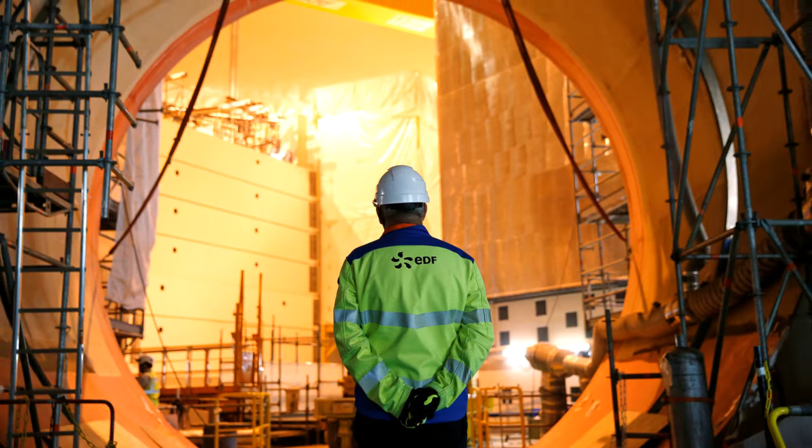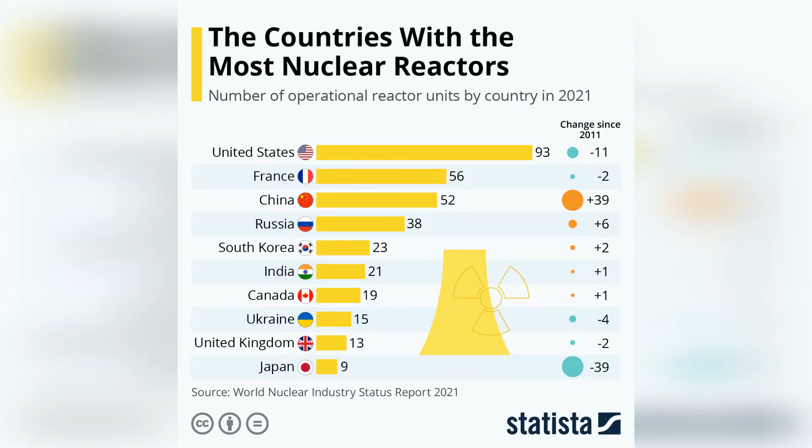There are now 56 nuclear power units operating in France. This is the second largest nuclear power plant fleet after the United States. The share of nuclear energy is about 70%. And the most interesting thing is that it was all done in a very short time. France built 70% of its nuclear power in just 10 years.

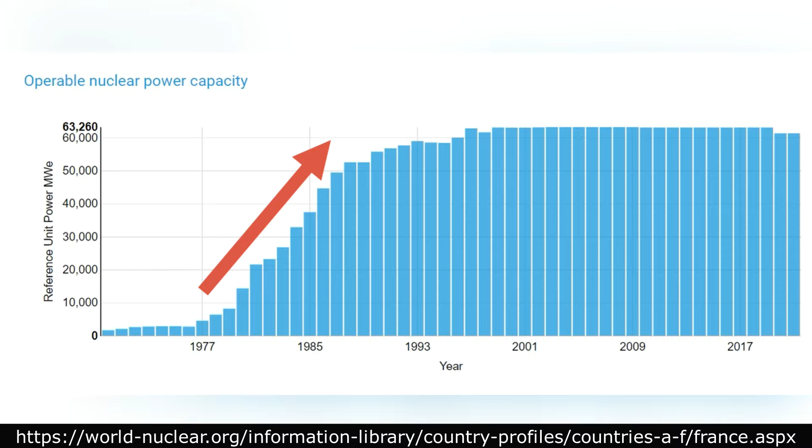From 1979 to 1989, the capacity of their nuclear power plants increased from 8 to 52 gigawatts, that is, more than 6 times. The example of France shows that nuclear energy allows in a fairly short time to radically change the country's energy sector, dramatically reduce emissions, while creating reliable sources of electricity that do not depend on either the weather or changes in hydrocarbon prices.

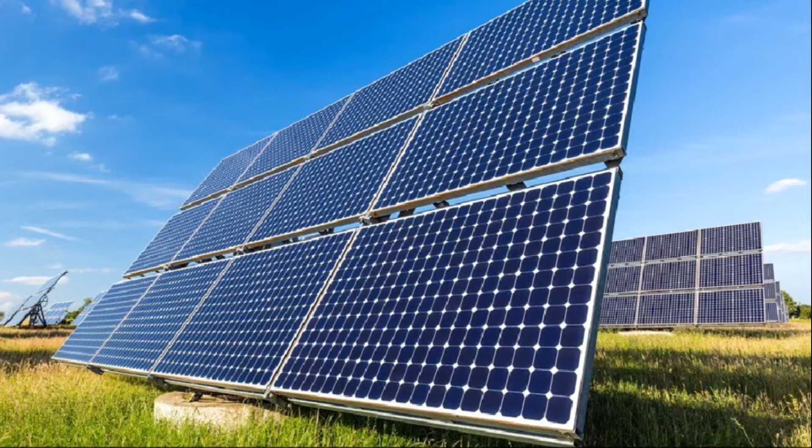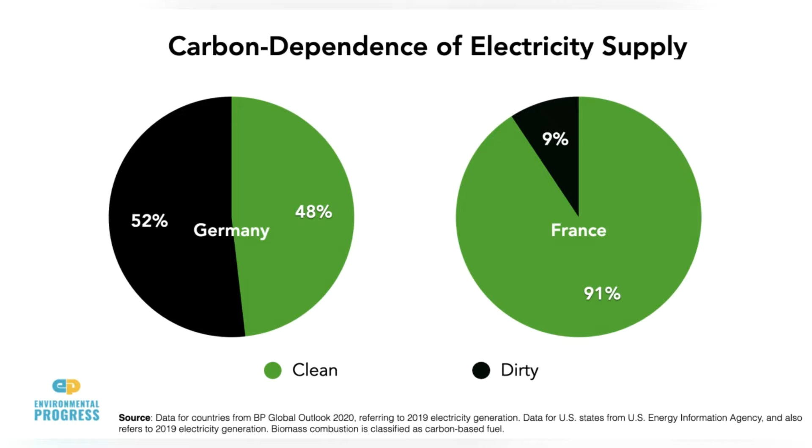Trying the same kind of energy system change, but with only solar and wind power plants, Germany so far cannot show the same results, neither in terms of the speed of change, nor in terms of the achieved indicators. The share of renewable sources in the energy balance of Germany is already about 40%. But emissions per kilowatt-hour are still several times higher than in France, because, abandoning the atom, Germany continues to burn coal and gas.

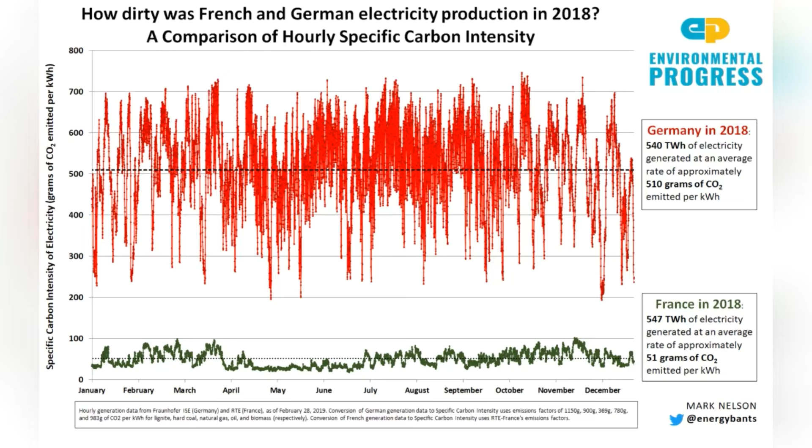France, along with the UK, are European leaders in promoting the idea of developing nuclear energy, and together with them, at least 10 European countries are in favor of this.

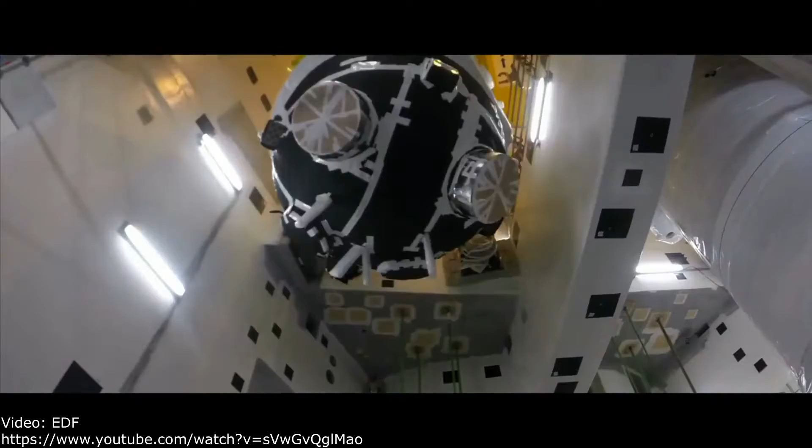Another important point in Macron's speech: he specifically emphasized that the planned construction will be the first construction of a new nuclear power plant in France in decades. It's true. The last time a new nuclear power plant was built in France was at the end of 2007, more than 15 years ago. This was the Flamanville 3 nuclear power plant, which is still not actually completed.

Speaking for the whole of Europe, well, not counting the launches of nuclear power plants in Russia and Belarus, the last time a new nuclear power plant was launched in Europe was also 15 years ago. In the same year 2007 it was the launch of the Cernavodă nuclear power plant in Romania with a Canadian CANDU reactor. But in principle, new large power units in Europe are now beginning to be built.

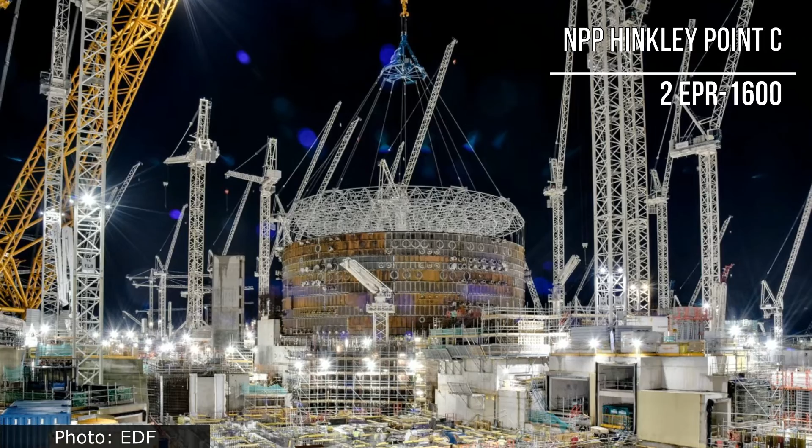In 2018 and 2019, the construction of 2 units of the Hinkley Point C nuclear power plant in the UK began. By the way, it is France that builds them. But I will talk about them a little later.

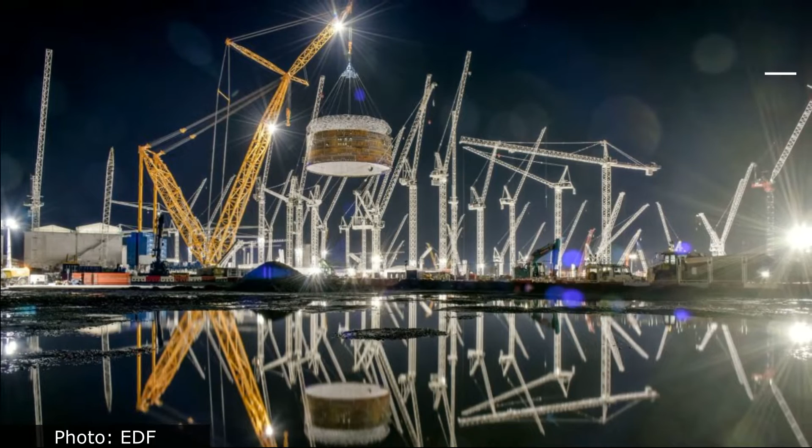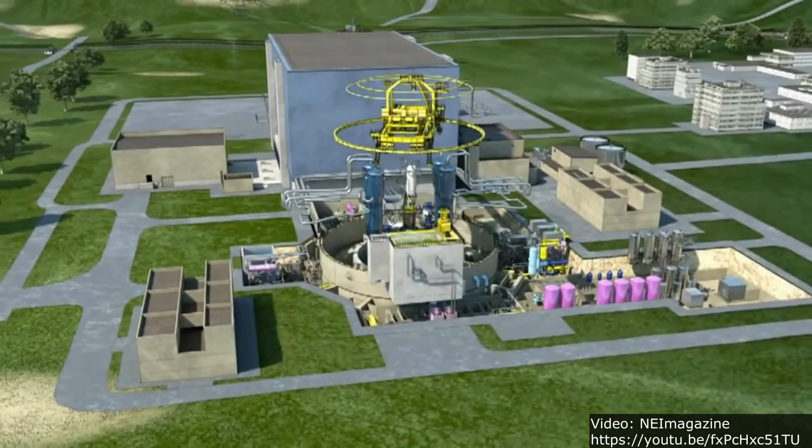The main new reactor for future nuclear power plants in France should be the EPR-1600 reactor, or its improved modification, EPR-2. EPR stands for European Pressurized Reactor, that is, the European Pressurized Water Reactor, although in the case of the export version, the first letter E stands for evolution. By type, this is a classic PWR, with an electric power of about 1650 megawatts. This is the most powerful nuclear power unit in the world.

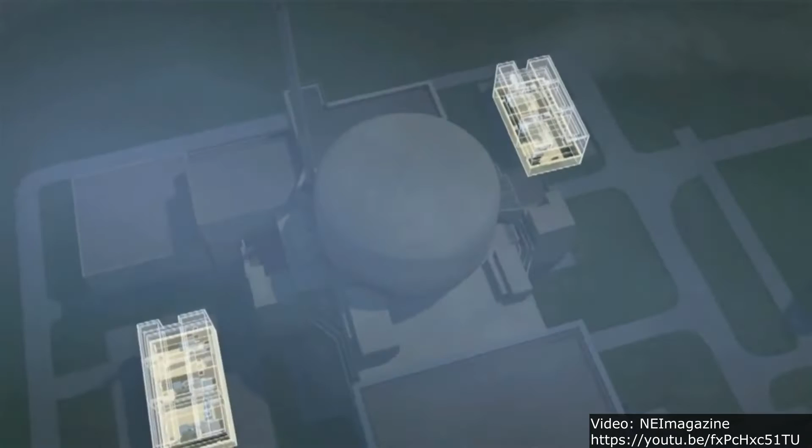The closest operating power units have a capacity of about 1,500 megawatts, and these are just the predecessors of the EPR, the French N4 reactors, on the basis of which it was designed.

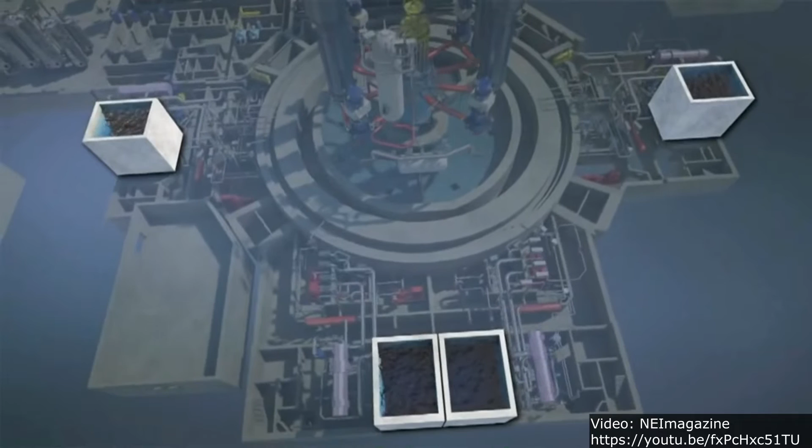Speaking of design, the word European in the name is not accidental. Initially it was a joint German-French project developed by the companies Framatome of the Areva Group and the German Siemens. This is the first European 3+ generation reactor.

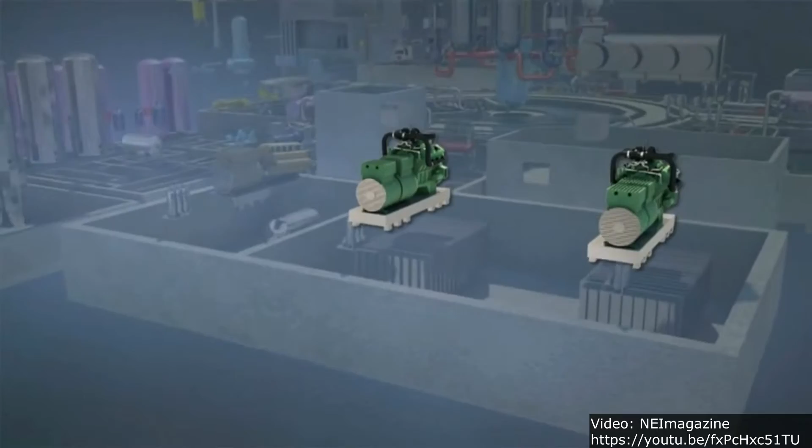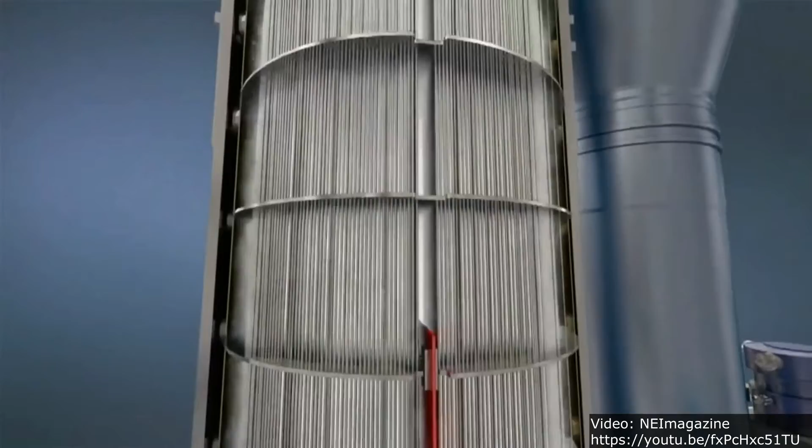About the generation of reactors, it will probably be necessary to make a separate video. But let me explain that what is now being built is mainly reactors of the 3rd generation, and even generation 3+, which have additional post-Fukushima safety requirements. In general, Generation 3 differs from its predecessors in greater fuel efficiency, better economic performance in both construction and operation, and improved safety systems.

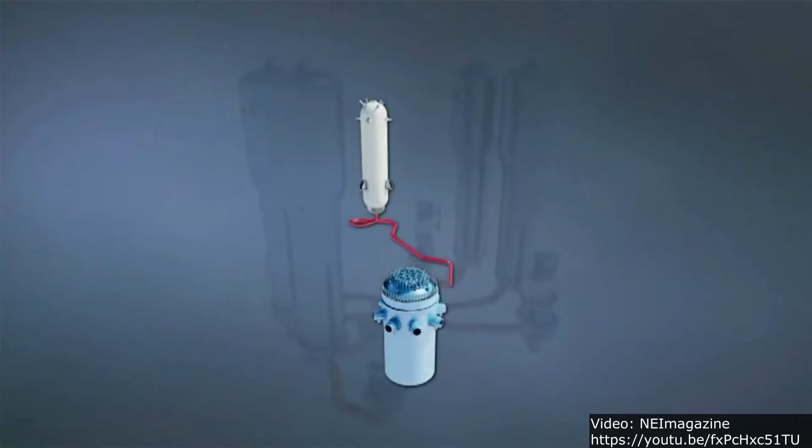Specifically, if we talk about EPR, then it should use 17% less uranium, be able to operate on reprocessed uranium and on a full load of MOX fuel. In the meantime, in France, MOX fuel is loaded into some pressurized water reactors, but only partially, no more than 1/3 of the entire core.

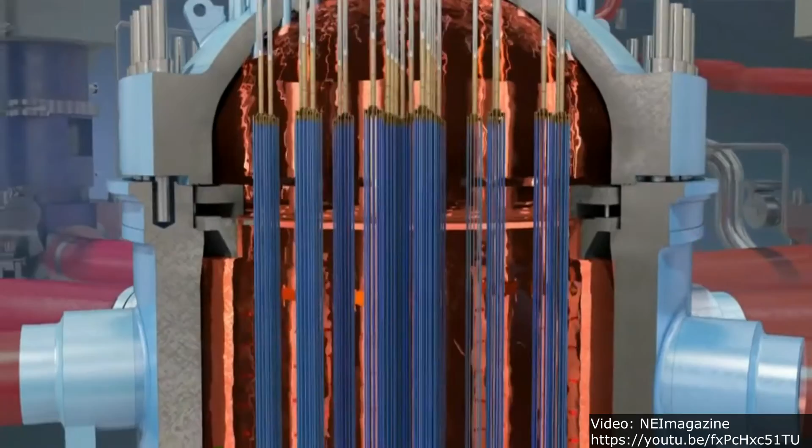EPR can also work effectively in maneuver mode, reducing its power depending on the load in a wide range, from 50% to 100% of power during the day. In addition to improving safety, which reduces the likelihood of severe accidents by orders of magnitude, it has systems for localizing beyond design basis accidents.

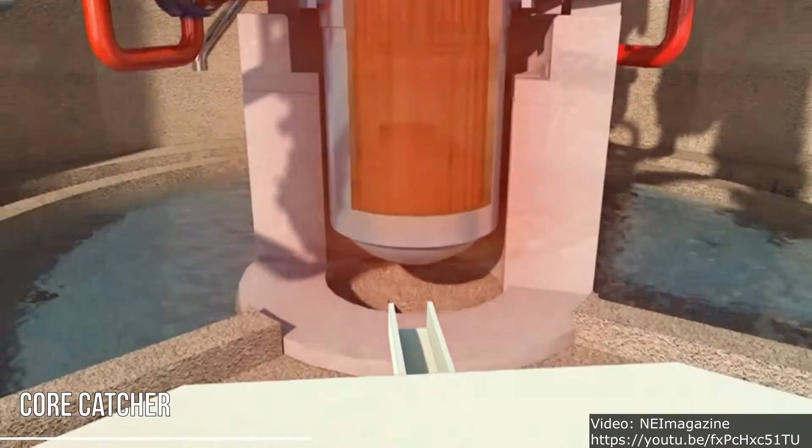This means that even if the worst happens and the reactor core is left without cooling, it starts to warm up and melt, as was the case in Fukushima or Three Mile Island. It has a special core catcher under the reactor to hold the molten fuel, so it should not go beyond the sealed volume of the power unit.

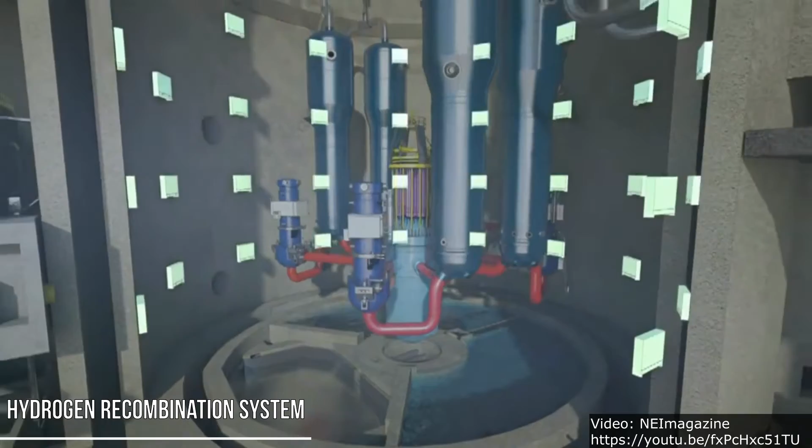In addition, there are hydrogen recombination systems, which also excludes the Fukushima scenario, where the hydrogen formed in the core due to the zirconium-steam reaction led to explosions in reactor compartments and radioactive emissions. Here at the EPR there are systems that will utilize this hydrogen if it appears in the reactor compartment. Not to mention that they are now developing and gradually introducing tolerant fuel, which should solve the same problem by excluding the steam-zirconium reaction.

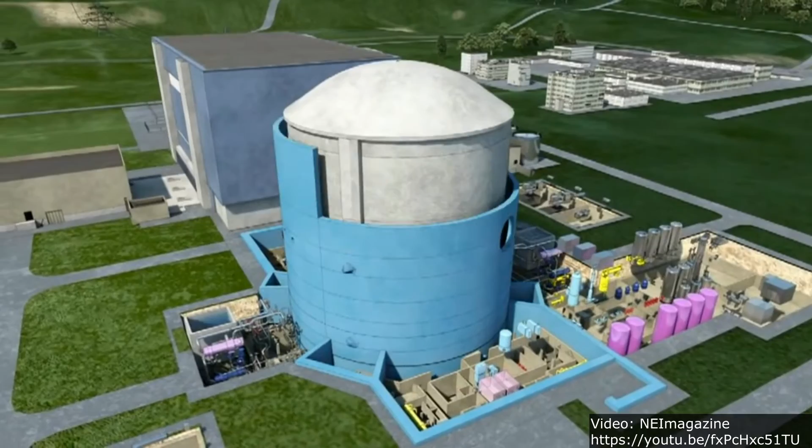Of course, the unit has a reinforced double concrete case covering the reactor compartment. But it's worth noting that similar systems, in whole or in part, exist in other Generation 3+ reactors, for example the South Korean APR-1400, American AP-1000, Chinese Hualong-1, or Russian VVER-1200.

But let's go back to France and look at where EPR reactors are being built. They are now being built in France, Finland and the UK, and the first two such reactors have already been built in China. The first EPR reactor began construction in Finland in 2005, at Unit 3 of the Olkiluoto NPP. Fortunately, this spring it was finally launched, becoming the first EPR built in Europe.

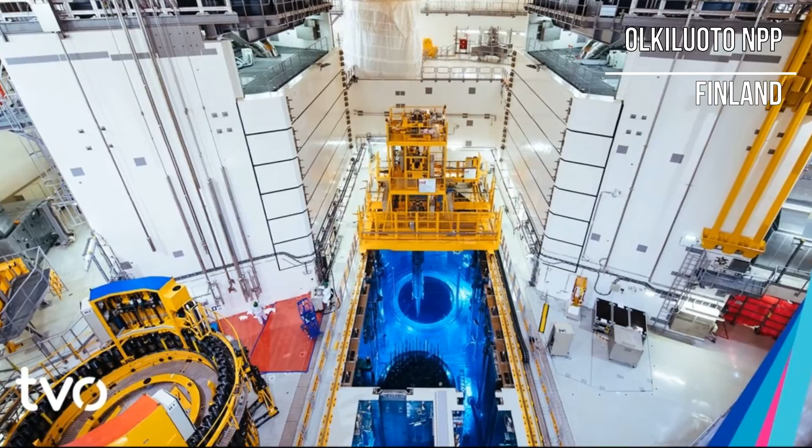Two years after the Finnish one, in 2007, construction of a unit with an EPR reactor began in France itself — the third unit of the Flamanville nuclear power plant. This is the last unit of a nuclear power plant to begin construction in France in more than 10 years, as Macron said. This unit has unfortunately not yet been completed, but it's expected to happen this year or next.

Delays in construction also led to an increase in the cost of the station. They grew from 3.2 billion to more than 12 billion euros — four times — that's over $8,000 per kilowatt.

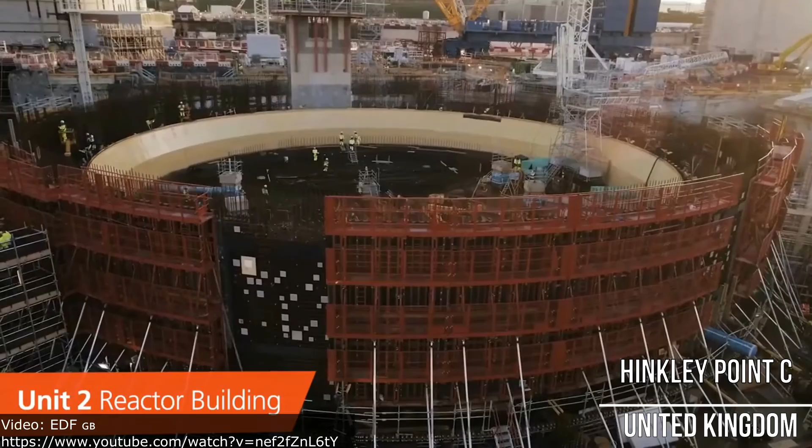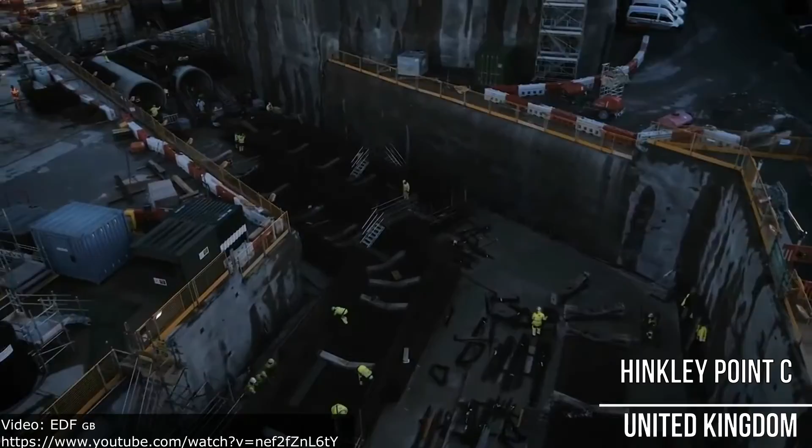In 2018, construction began on the Hinkley Point C nuclear power plant in the UK with two EPR-1600 reactors. This is the newest and largest nuclear power plant construction in Europe at the current time. The two power units, with a total capacity of more than 3 gigawatts, will provide about 7% of the UK's electricity. Its cost is also huge, about $30 billion, or about $9,000 per kilowatt.

By the way, the French EDF together with the Chinese company CGN pay for it. The latter owns about 30% of the project, and the French own two-thirds. Hinkley Point C is planned to be handed over by 2026, unless, of course, there are delays.

The only EPR-1600s built so far are operating in China — two units at the Taishan nuclear power plant, launched in 2018 and 2019. They were also built with delays and an increase in estimated cost of about 60%, but still ended up cheaper and faster than in Europe.

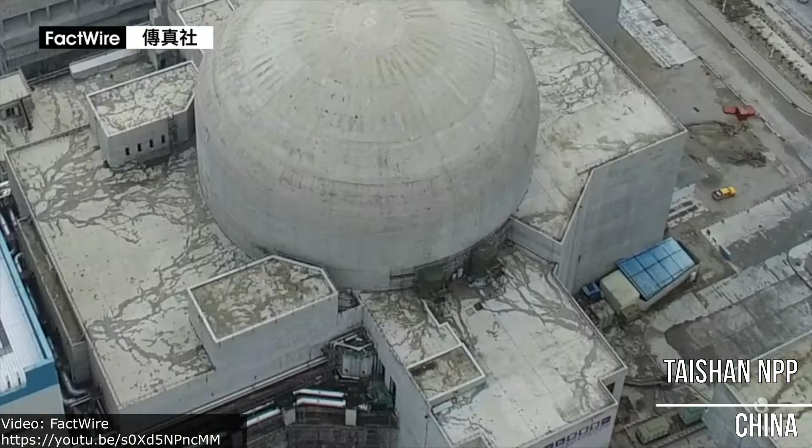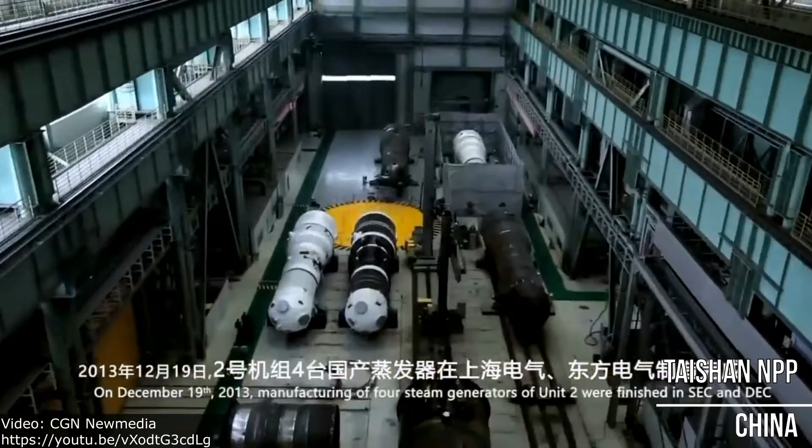Their cost is estimated at half that of the European ones, about 6 billion euros per power unit, or about $4,000 per kilowatt of capacity. This nuclear power plant, like the British Hinkley Point, is a joint Chinese-French project, but the shares are different — here 30% belongs to the French EDF, and 70% of the project belongs to Chinese companies.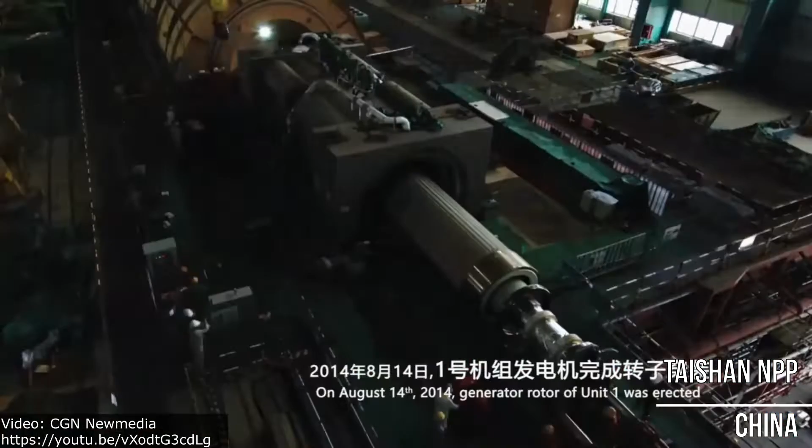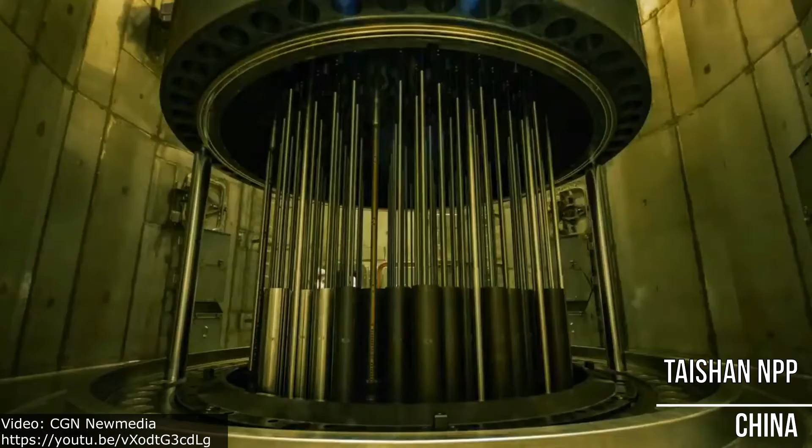So China, with its massive serial construction, and most importantly with access to cheap government money, shows that it is possible to build a nuclear power plant much cheaper. I talked about the mass construction of nuclear power plants in China and the results of last year in a separate video — the link to it is now on the screen at the top.

According to some estimates, if the construction of Hinkley Point C in the UK had attracted cheaper public money — for example, 2% government bonds — instead of private loans with a higher interest rate, the construction could have cost half as much as in China. That is why the inclusion of nuclear energy in the European taxonomy is so important: it will allow attracting financing to nuclear projects on more attractive terms.

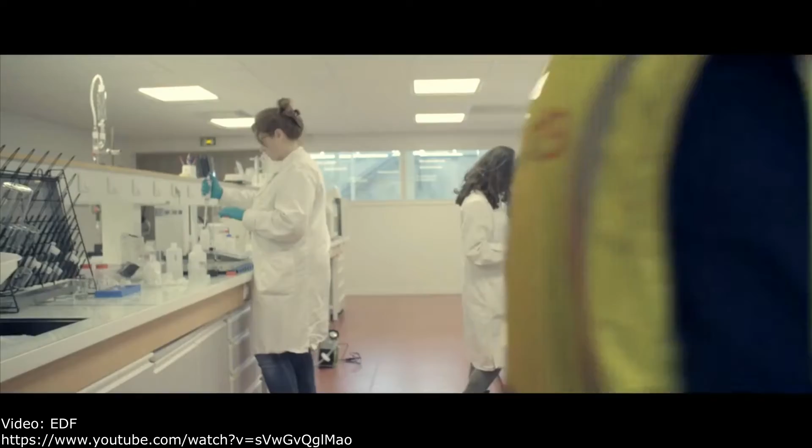Let's get back to technology. France is well aware that the offered prices for its nuclear power units are among the highest on the nuclear market, and is trying to take into account the bitter experience of construction both in France and in Finland, and the more successful experience in China.

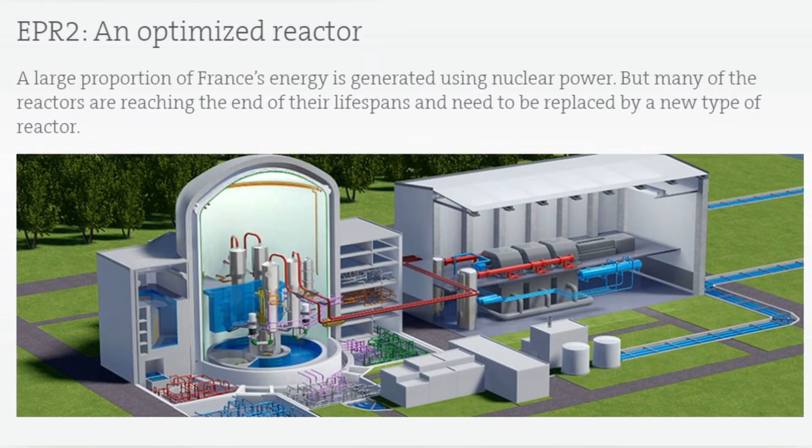Since 2015, they have been developing an optimized EPR-2 reactor, which should be cheaper both in construction and operation, and perhaps even its power will be reduced. In France, EDF plans to build 6 units in the first place, 2 at each of 3 sites. Such a combination should also help optimize costs.

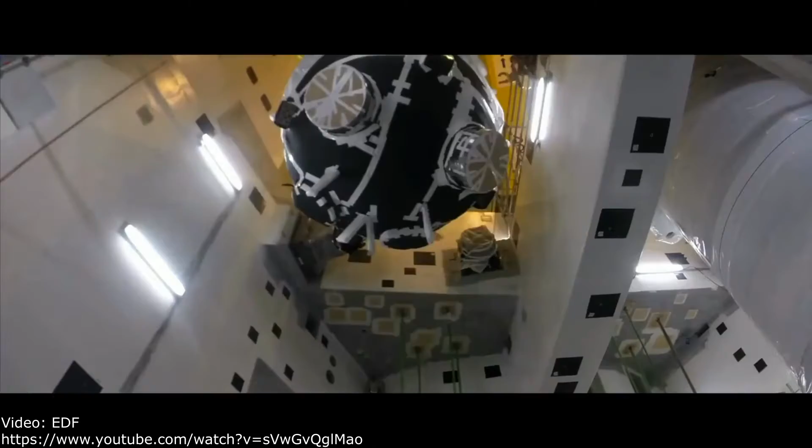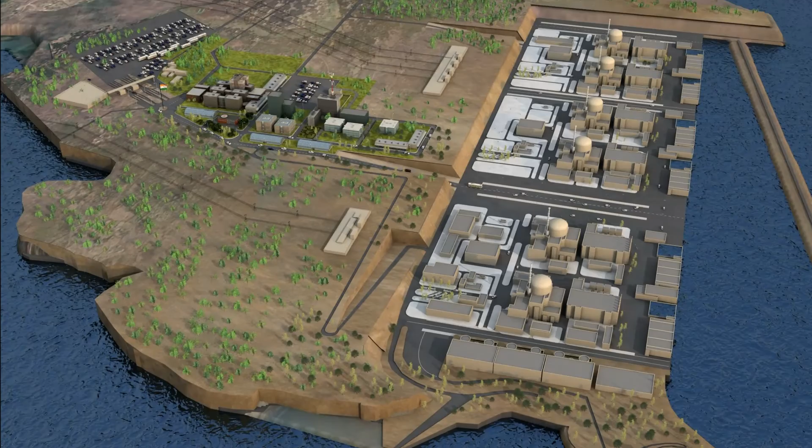Let's see what happens. By the way, in addition to the plans announced earlier by EDF for 6 new units in France in the near future and 14 by the middle of the century, the French are discussing construction projects for up to 6 units in India, 4 to 6 units in Poland, and expect to participate in a tender for a nuclear power plant in the Czech Republic. But again, plans are one thing — we'll see how it turns out. In any case, we wish the French good luck.